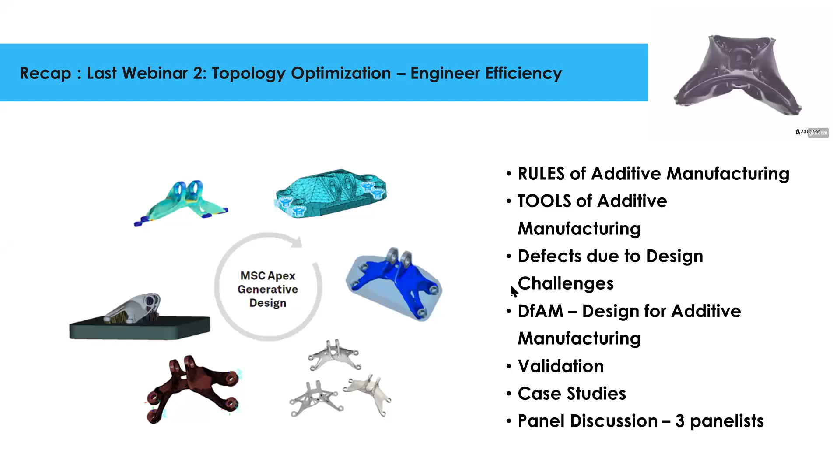So let's get back to the core topic. This was the poll we did. Similarly, we want to do a poll again for this session. Sankha, can you post that poll so that we understand the audience, their interest and where they are coming from, so that we have our panel discussions and the session catering to the overall perspective: where our audience is coming from, where we are situated as a service bureau, how the AM OEM manufacturers of the power sector, as well as AM machine manufacturers, post-processing manufacturers, raw supply chain for the powder, those sort of players as well, get the perspective of our audience, and how we can generate the momentum. That's the key core agenda for staying connected as a community who is invested in this evolving technology, and how we can work together. So poll, please, Sankha.

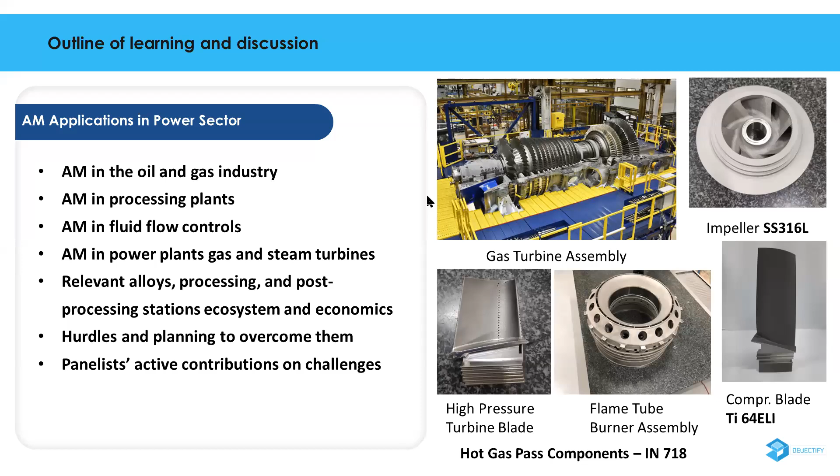Okay, so let's get started. So the first one is the oil and gas industry. So most of the equipments are being used in sea and groundwater type of scenarios, where it has to be corrosion resistant as well as foolproof to that sort of environment. So the strength and durability and prolonged service life is also expected.

So for the purpose of showcasing some of the photos and case studies, we had chosen some of the typical components that we had produced, and some of the components you can see over here: impellers, open and closed type, or fluid control, hydraulic manifolds, or inducers, those sort of components. And the material that we can use for that is either SS316L, that's the stainless steel grade, or titanium alloys.

And on top of that, I would like to address on the go that although there are few grades that are easily applicable and adopted by the industry, there is still some amount of work to be done. Certain grades of steel that industry is very comfortable with and had been practicing for so many decades or even centuries, and there is an effort needed to develop those sort of materials on additive manufacturing platforms too.

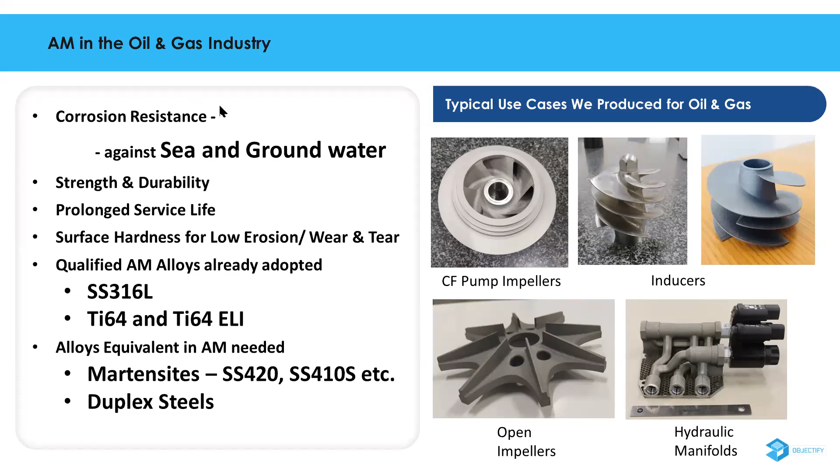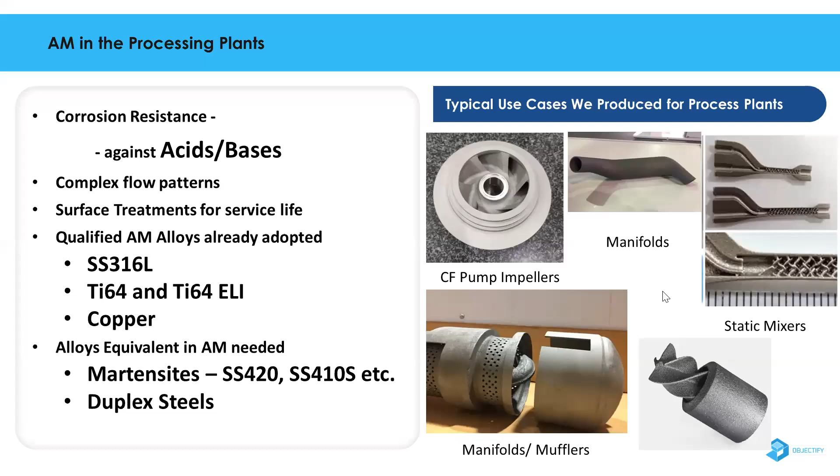So again, in case of processing plants, the similar requirements, acids or bases, but few examples of that again I am sharing. So in this case, the static mixers are unique. So if two materials or fluids had to be mixed in a flow, then these type of features are very difficult to make, and only additive manufacturing is allowing it to be done very easily without a severe amount of pressure loss.

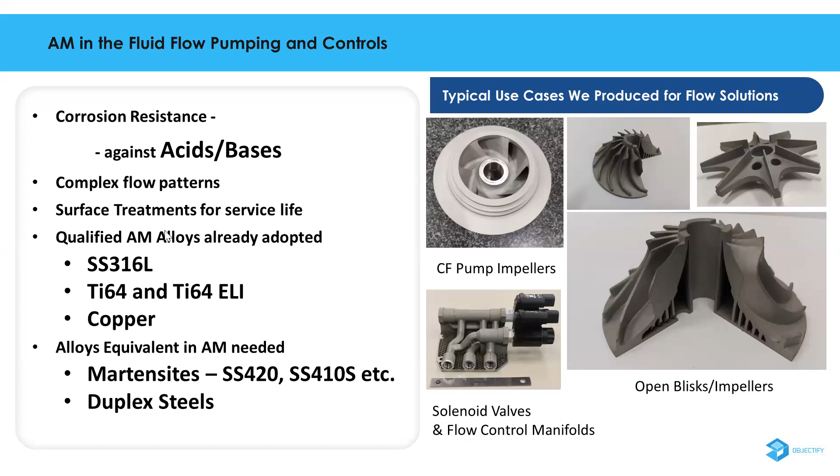Then third one is the fluid flow and control. Again, the similar sort of components, so centrifugal pump impellers or blisk or open impellers, solenoid control valves, these are again being developed. So in this case as well, the complex fluid flow pattern, so a lot of undercuts and complex geometry, which is curved vane type of geometries, are common, and surface treatment for service life is also crucial.

So now coming to the topic of gas and steam turbines, in those cases, the highest amount of service temperature you can imagine is being experienced by these alloys. So typically 800 to 1000 degrees Celsius or more is the service duty cycle in certain turbine zones, exactly after the burning hot gas passes over the turbine rotor blades as well as the stator vanes, and the flame tube itself is also at quite drastically higher temperatures. So the alloys being used in those scenarios are mostly nickel alloys. Inconel 625 and Inconel 718 are being used in these scenarios.

But on top of that, additional grades of nickel alloys are in demand. So CM247 is slowly graduating and transitioning to be adopted in AM. Similarly, there are few more nickel alloys, super alloys being used in the gas turbine and steam turbine type of industries, which need to be qualified for additive manufacturing. And on the compressor side as well, lightweight titanium or titanium aluminide type of alloys are used for the blades or the stators.

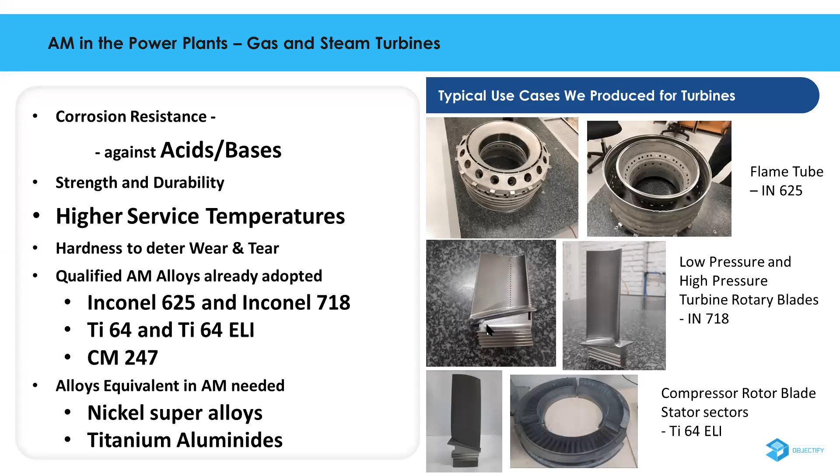So that's how additive manufacturing is being looked at for gas turbines, and gas turbines are being used in the aviation industry, and we are riding on that curve of learning. That's beneficial for this power sector, because already the due diligence and service duty cycle and life cycle had been tested rigorously for the aircrafts, and GE being one of the leaders, then Rolls-Royce, Collins Aerospace, all these types of companies had looked at it thoroughly and had been qualifying the components. So AM can ride on that learning and refer to those data.

So these are the typical materials that we recommend to our customers. So in metals, we have several alloys. In steel, the ferrous alloys are MS1, tool steel in H13. Then in stainless grade, we have Corrax CX, and that's a corrosion resistant, good quality alloy. Similarly, SS316L, SS17-4PH, and there are a few more under development as well in stainless steel grades. So these cover the austenites, but martensitic alloys are also under investigation and being developed.

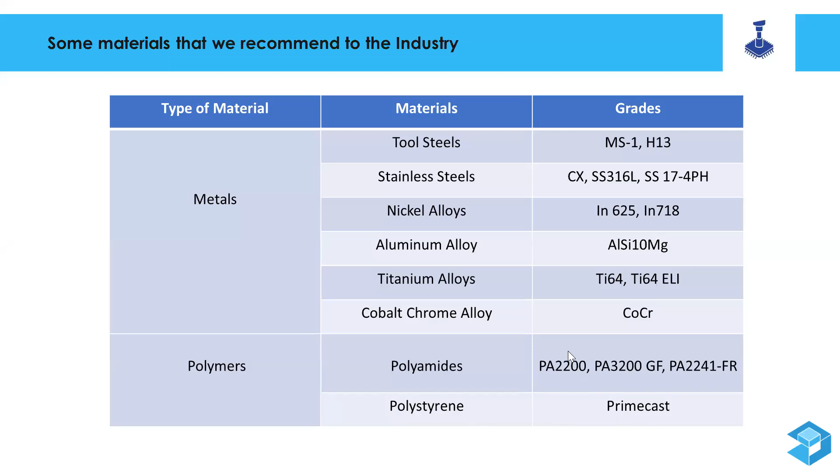Nickel alloy already mentioned. Aluminum grades are there. Titanium also, and cobalt chrome. Copper is being developed as well. In polymers, there are a few relevant polymers that this segment of industry can consider to use. So that's the PrimeCast for casting bigger size components. So that is something people can consider as a lost wax method for investment casting. The pattern can be 3D printed using PrimeCast polystyrene, and certain flame retardant as well as glass filled types of nylon components can be serving field duty as well.

So let me move on to the news and highlights that happened in the industry. So GE had been a first mover. They formed the additive division and acquired two big companies in additive manufacturing. Those are mostly machine makers like Concept Laser and Arcam EBM. And they acquired some aero related businesses as well. Those were the early adopters of the technology, and GE aggregated them and is serving a variety of interests in aviation, power sector, healthcare, and all.

So similarly, Siemens is another big player, and we have among the panelists one of the senior ranking executives from that organization. This corporation had been a huge player in the domain of the power sector, and they have installations of gas turbines, steam turbines, and allied subsidiary operations across the world. And they acquired Materials Solutions group, and that is playing in additive manufacturing. And Siemens had been a good provider of software solutions as well. So they have the Unigraphics NX modules and Teamcenter product lifecycle management solutions.

So under that umbrella, they are bringing the new acquisition of Atlas 3D, and with that, additive manufacturing is going to be catered as well. Just like the conventional designs that you can make using their workbenches for casting, forging. Similarly, for additive manufacturing, 3D printing, whichever process you want to pick up, based on that, you can program and design catering to that manufacturing life cycle. So that is something amazing, an aggregation and integration happening in the industry.

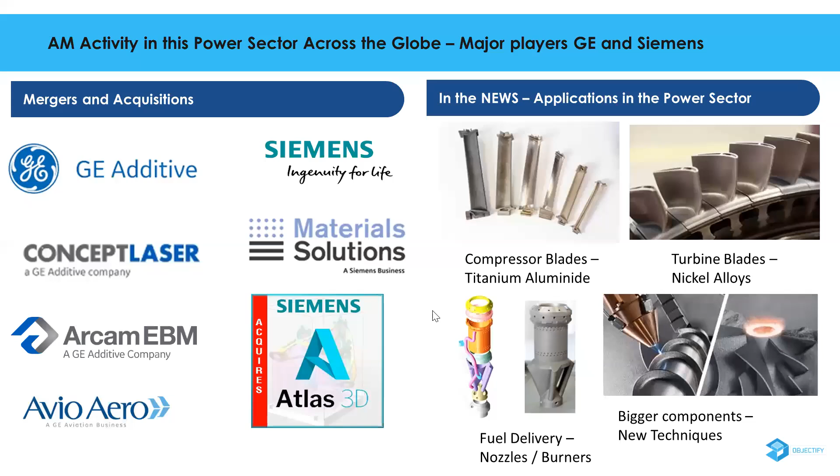So since you are melting and remelting, or you are making a tiny piece of component from a very huge block of component, there had been a lot of wastages, as well as the slow pace of transition. So disruption of supply chains is something that Ankit spoke at the beginning. And in case of the COVID example, we saw that a lot of players wanted to make certain healthcare equipment ad hoc, and they were able to manage because of the advent of 3D printing. They had those sort of machines at their disposal, and it was in-house. They can fabricate and produce those sort of components.

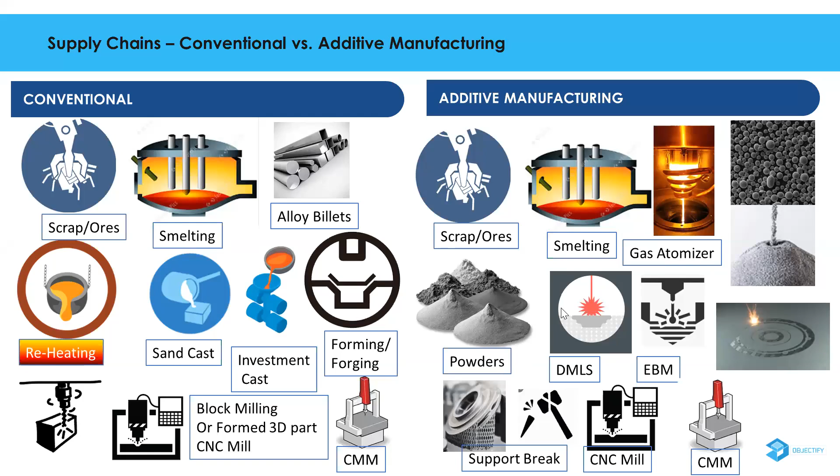So in a summary, the conventional had been very centralized, capital intensive, and fixed automation type. And you can expect huge volume of production out of that at cheaper rate to make a lot of variety of components. So limited flexibility to handle the changing needs. And there had been a lot of handshake necessary. So you need to work with a lot of supply chain partners in conventional manner.

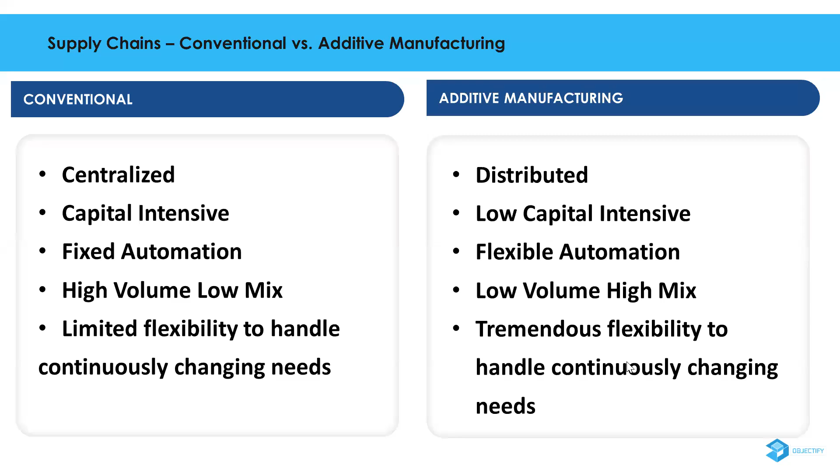But in case of additive, it can be distributed, low capital intensive, flexible enough, and it can handle low volume, high mix. And tremendous flexibility is in fact the tremendous attribute of this additive manufacturing technology. So with that, you can handle the changing needs quite efficiently.

So conventionally, the production immediately cannot be replaced. Since those are fixed automation, the capital intensive heavy lifting had already been done. So gradually this technology is filling up the shoe where it can efficiently play a role. That's the maintenance, repairs and overhauls. So in those cases, physical inventory had been a common norm.

So I think one of the case study examples you can take is the agricultural industry. In that sort of industry, there had been a lot of huge warehouses built by big players, and they have around 3 or 4 football field type of warehouses to keep the components, and the equipments are continuously evolving. So if 20 years old equipment gets faulty, they had to run around and pick up.

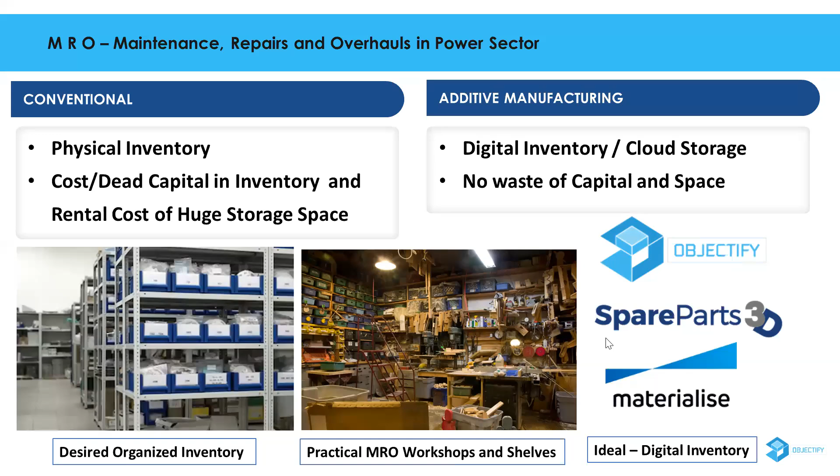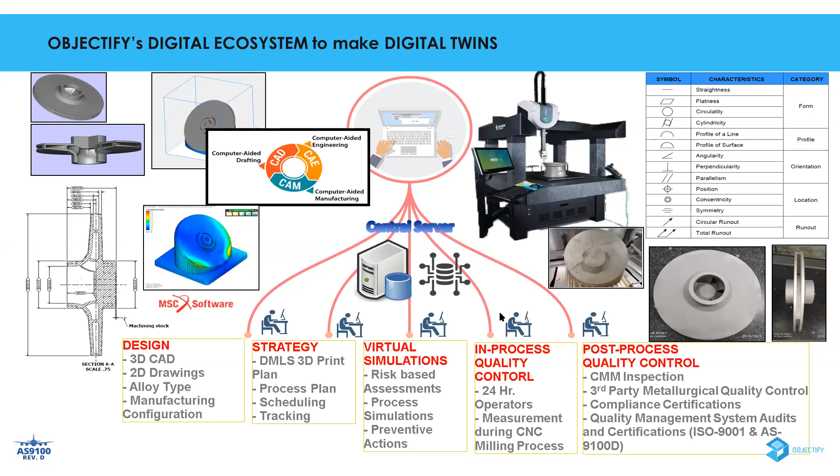So they can qualify the components with us and distributedly manufacture the parts if it is necessary. So we can do the handshake of sharing the digital twins once the parts are qualified and scale it up if you want to build on-demand inventory of small scale in distributed fashion.

So again, going back to the quality control, as I briefly mentioned, the certification that we secured already is ISO 9001. That's the basic for auto sector, FMCG, white goods to work in India. And its qualification is sufficient to deliver services in those segments of industry. For aerospace specifically, the stringent quality requirements and the level of detail is essential. So that's why we acquired this AS9100D.

Similarly, we have with us today DNV GL's representative, Mr. Sastry sir. So there had been efforts and spearheading by DNV GL to adopt these type of components in oil and gas and offshore industry and power sector. So he will briefly explain about that later.

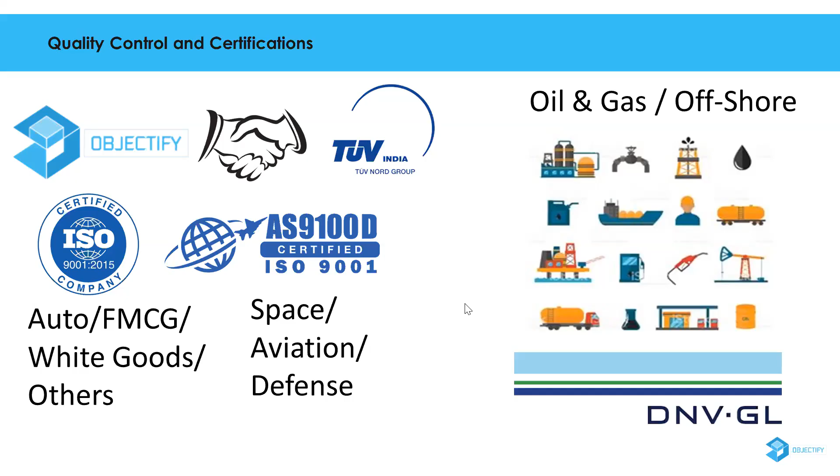So today I would like to introduce Mr. Benjamin Moey, who is one of the panelists for the talk today. He's joined us from Siemens Singapore, and he's a great friend and a great evangelist of the technology in that region. He has been working with additive for quite some time now, and he is in an organization which I think is one of the most invested organizations in the world right now for additive.

And that's how we see the region where we are, Southeast Asia and the SAARC region, where most of the energy requirement is coming in, and a lot of people are looking at additive as a solution. So today he'll be joining us. He'll be talking about additive manufacturing in the power sector. Benjamin, do you want to introduce yourself?

Thanks, Ankit. Thanks for having me here today. Hello, everyone. I've been following additive manufacturing for quite a while, and at Siemens we've been on this journey for quite a while, and I hope to share as much as I can in this space and see the future for it.

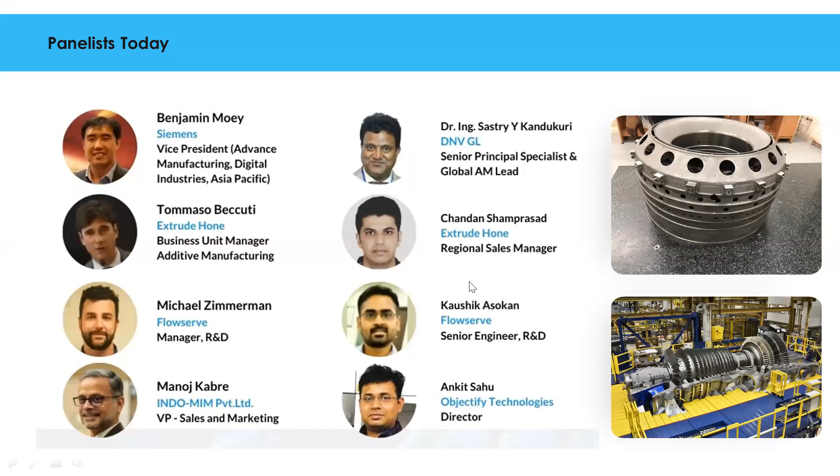I think this whole current situation has really pushed a lot of companies to rethink their supply chain strategies going forward. With a lot of countries being locked down, especially China in this case, a lot of my customers are struggling to produce stuff, and they can't get access to supply and spare parts. So a lot of the community, at least in my region in ASEAN, have been reaching out to the AM community within Siemens and our partners. So we see a stronger push and revisiting and adoption of additive manufacturing as a source against disruption of the supply chain going forward. So I'm pleasantly optimistic that once we get through this, things will move more rapidly towards adopting 3D printing.

Sure, sure. Thank you, Mr. Moey. Thank you for joining. Exactly. Cheers. Yes, cheers. Then the closing line, if I can get from Dr. Sastry. Yeah, thank you very much. Yeah, in general, first, do you want me to comment on what is the future? Yes, yes. Like a thought.

Okay, yeah. So not only my opinion or thoughts, but we have already been experiencing this for more than 100 days in Singapore, and I have seen actually a clear change of mind with many of our customers and those people we are interacting with. Actually, they see there is a bright future for additive manufacturing, and they see that this is one of the alternative routes you must secure to keep your supply chain alive. So yes, I have a very good impression that despite COVID, which could have actually stopped the funding flow to some extent, the spirit is very high and the activity level is very high.